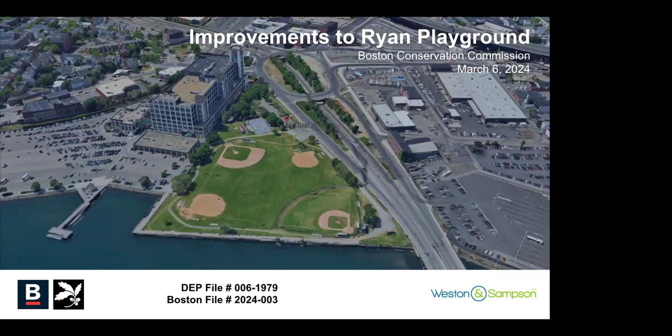Okay, fantastic. A few things. First of all, Commissioner Long, you probably have something to say here before we get going. For the record, yeah, I'm going to have to recuse myself because I work for the applicant. Fantastic, thank you. And let the record reflect that Commissioner Conan has joined us. Good evening. Good evening. Okay.

Okay, Brandon, I see you have about 19 slides. You know our level of education here, so I'm sure it'll be quick, I promise. Yeah, that you can get through.

Thank you everyone for listening to us here tonight. We're really excited to present Ryan Playground. We are just fresh off of getting our MEPA certificate and excited to present to you guys tonight. This project has been around in our public process since 2021, so we are eager to move forward, but excited to understand what you guys have to say. I'm going to pass it off to Weston and Sampson.

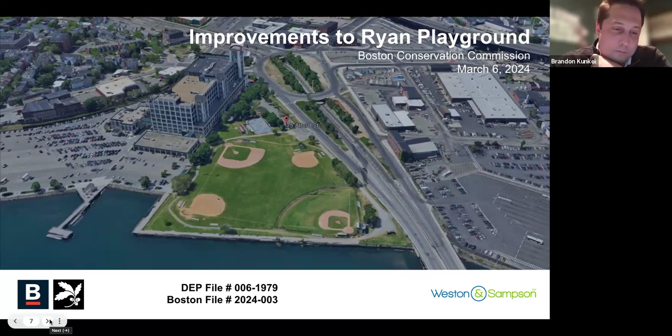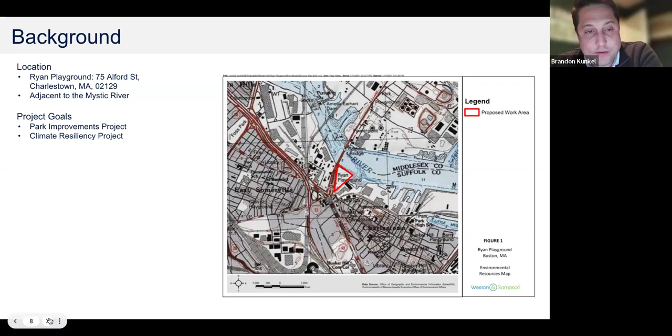Great, thanks so much, B. Yes, we are here tonight on behalf of Boston Parks, and we'll just go through the overall project, and then we'll open it up to you folks for questions. Next slide. Just real quick, 75 Alford Street, Charlestown, Mass, sits adjacent to the Mystic River. It is a total park improvements project and a climate resiliency project, as we noted in the opening. Next slide.

Some existing conditions include the ball fields, the hockey rink, a playground, the Eversource head house, edge conditions along the Schrafft's Center, an existing harbor walk, and an existing seawall. Next slide.

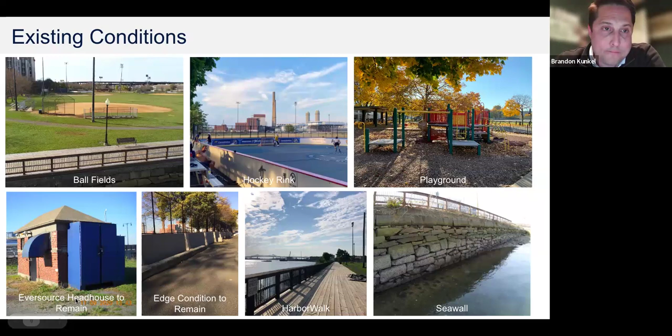There is an existing parking lot. We are reducing it from 38 parking spaces and keeping 6 total parking spaces for emergency vehicles and accessible parking. We are upgrading the stormwater system throughout the entire park, and we will talk about that.

We will be installing a berm for climate resilience within the buffer area, which is the key trigger for this evening, but it's for climate resilience, erosion resistance, and plantings will be provided.

We will be providing ADA and MAAB standard walkways and pathways throughout the entire park, as there aren't many now. We'll be providing public spaces throughout, including 2 overlook decks along the Mystic River, as well as a river walk and additional plazas and park entries along the berm.

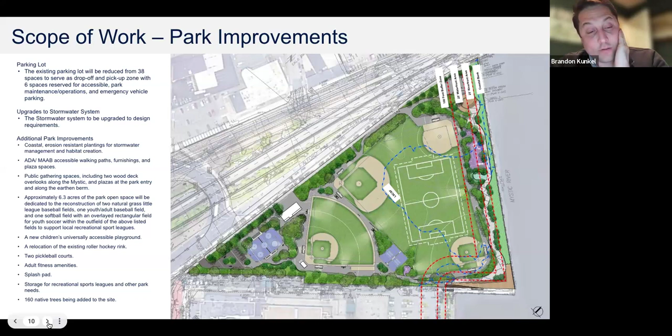A universal accessible playground. We'll be relocating the existing hockey rink, adding 2 pickleball courts and an adult fitness area, a splash pad, and storage, and then installing 160 native trees. Next slide.

Along the top of the berm, and unfortunately the slide is cut off because of the cameras, but we are proposing a river walk. The berm will be vegetated heavily along the Mystic River side in order to reinforce the berm itself from erosion, as well as provide natural habitat.

The river walk will be approximately 6.5 to 7.5 feet above existing grade, and that is dictated by the 2070 sea level rise elevations of elevation 22.

And we will be installing walls as part of constructing the berm in order to hold up the river walk, and that'll be supported on lightweight fill and ground improvements, which are all within your jurisdiction. Next slide.

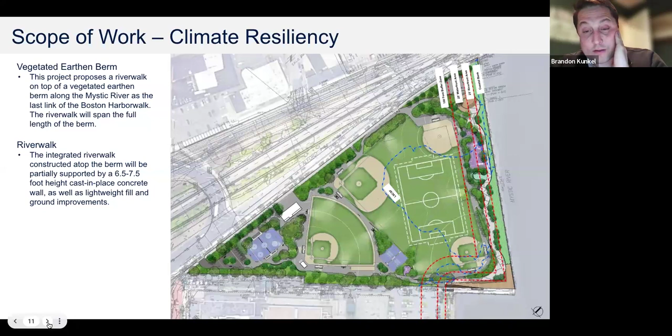And if Haley is on and able to speak, I would actually like to hand it over to her. Sure thing, I'm here as long as everyone can hear me. So I am the wetland scientist who worked to pull together these permits. I'm going to speak just very briefly through some of the impacts that we're proposing within your jurisdictional areas.

So within the 25-foot waterfront area, we are proposing 22,832 square feet of impacts. These impacts are associated with the proposed climate resiliency measures, including the vegetated berm, the seawall, and the river walk that Brandon was just mentioning.

Additionally, we'll be impacting land subject to coastal storm flowage. 115,512 square feet will be impacted due to the climate resiliency measures and the construction of the updated recreational fields.

Within the 25-foot riverfront area, we are also proposing 22,832 square feet. The impacts are associated with the climate resiliency measures that were the same as mentioned above. And finally, the coastal bank, we are proposing 929 linear feet of impact, which is due to the installation of the elevated river walk that will align with the limits of the coastal bank.

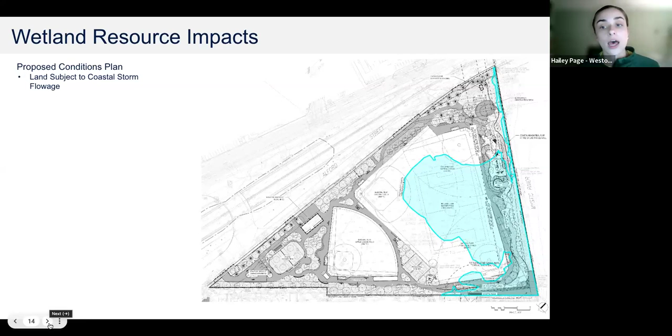If we could flip to the next slide, please. This is also looking to show the coastal bank limits that we will be impacting as a part of this project, which I think is blocked as well. So let's flip ahead to the next slide.

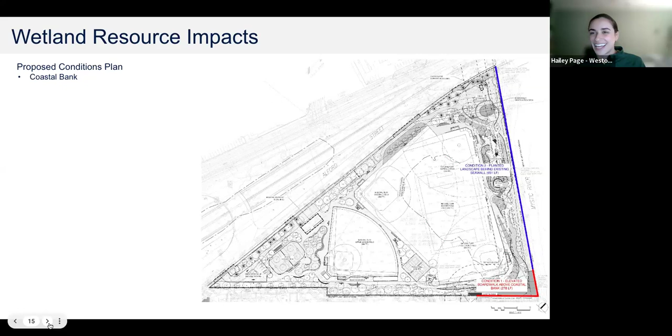Also, sorry Haley, I don't mean to interrupt. I just want to make sure I'm seeing the full slide deck. I was just wanting to make sure, can everybody else see the full graphics so that you can all see the plans and everything? It looks normal on my end. I just wanted to see how everyone else was seeing it. All good? It does. Hold on, I'm looking at the same thing. It's cut out, I can't see. I think on this one at the bottom it says maybe no, it's not boring location, but I don't see a legend on the bottom on this. In the NOI, I see legends on the bottom of these graphics.

I'm not sure we pulled legends into these because my intent was to point to the areas, but everyone's Zoom is a little different, some videos on the side, some on the bottom. As long as commissioners and the public can see the full plan set, we should be good. I can see the whole graphic, just wanted to make sure that was good on everyone's end. I think I see the whole graphic too, but I don't know what I'm not seeing, so I don't know if I can answer this confidently.

Is there a dialogue box? The edge of the park is essentially where it's closest to the river, that's where it would be cut off, at least on my screen. I can see the whole screen, but your voice comes and goes. Sorry about that, I'll get closer to my computer. Sorry if you're just looking at my eyebrows.

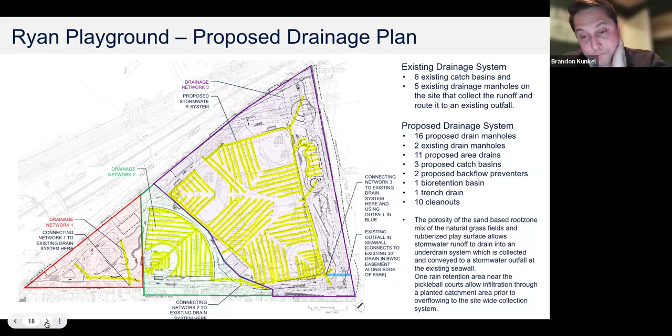And then I wanted to touch quickly on the resilience piece, because I know that's very important to the city. We did look at the 100-year 1% storm, the 4-year 25% storm, and the 1-year 100% chance storm. We looked at all those through 2070, 2050, and current conditions. Next slide.

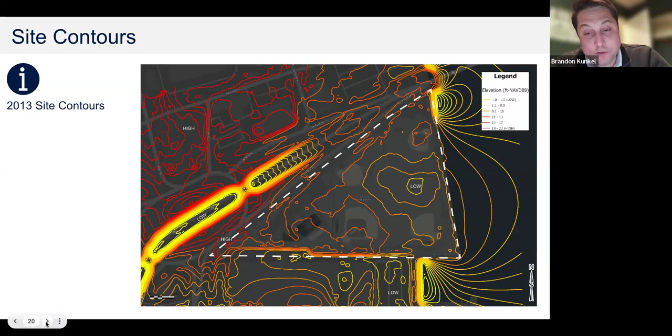This is just the topography as it is today, and you can see the low-lying areas up against the Mystic River, and then particularly out in Alford Street. As we jump to the next few slides, you'll see why these all make sense and why they're at risk.

So this is the current condition as it is today with regards to sea level rise and storm events. Now, to my knowledge, there has never been flooding on the site as it is today, but there are 2 major flood pathways that have been identified through previous studies, and they are on the adjacent site, but we are aware of that as this is a coastal resilience project.

We are combating that through berm construction, as I noted. But you can see here today, there is some risk to the site itself, but more importantly, I just wanted to point out that until the abutters and other adjacent property owners put in their mitigation and resilience measures, the site still will remain vulnerable. But it is just a key piece in the puzzle of a resilient coastline for the city.

So this is its current conditions as it relates to land subject to flooding during storm events. Next slide.

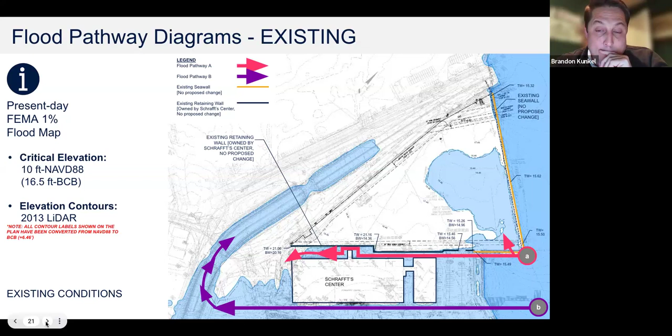This is the proposed condition in present-day data as it relates to storm events. So you see that's automatically mitigated. The park itself will be protected, but you can see during future storm events, the Schrafft's Center really does become the thoroughfare for flooding into the city itself, but we have mitigated it from the park side. Next slide.

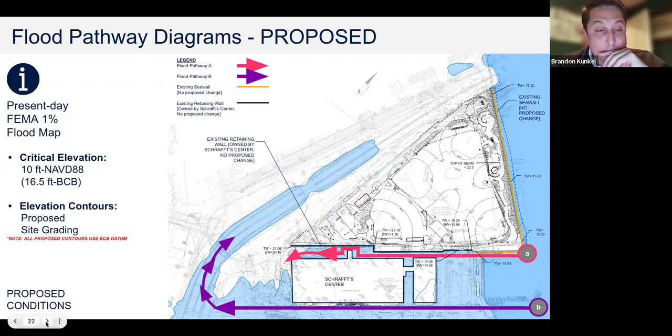And that is it, and I will hand it back over to you. Thank you for your time this evening. I know we probably went a few minutes long, but we felt it was important to tell the whole story.

Okay, great. Thank you. No, I appreciate it. And thank you for all the materials. It's not often we get Gaining Ground, Nancy Seasholes' book in an NOI. So appreciate that little piece of history.

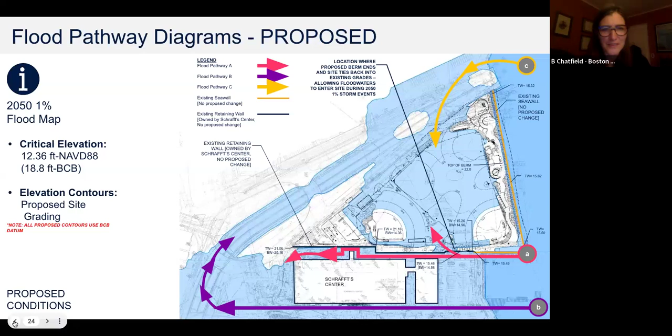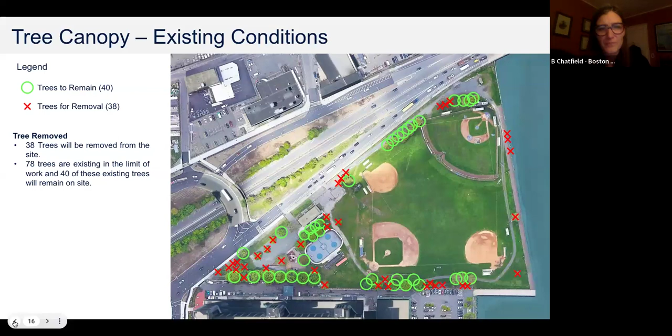Just to the site plan. Do you guys know what page it's on of the presentation? Is it the scope of work, climate resiliency slide? I believe it's slide 5. This one? Either one's fine. I was looking at slide 17. When I said gray, it was the slide you just passed. Yeah, right there. I don't know how to tell you where it is though.

Sure, are you sort of talking about, so you see the brown elbow down at the bottom of the screen? Yeah, so it's almost two thirds up from there, and there's a little appendage coming off the Riverwalk. It's almost a teal green color. Yep, and then above that there's a brown, semicircular ellipse shape.

Okay, so what is the teal thing, and what's just above it? That thing is a splash pad, adjacent to the playground, which will be spray to drain, and then that goes to the outfall.

And then I'm not sure what gray area you might be referring to. Maybe it's storage. Is it purple? The purple area is the playground adjacent to the splash pad. Okay, all right, thank you.

Thank you for bearing with me. No, that's fine, no further questions, thank you. Great, thank you, excuse me.

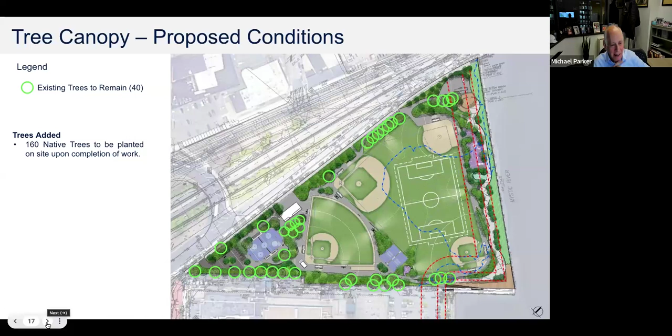Elena, any raised hands? I don't see any raised hands, and nothing has come in during the hearing in the inbox. Okay, great. So with that, I would entertain a motion to accept, to issue the order of conditions for this project and close the hearing.

So moved. We have a second. Great, okay, thank you. Commissioner Sullivan, aye. Commissioner Wilson, aye. Commissioner Conan, aye. Commissioner Richmond, aye. Commissioner Herbst, aye. And I vote aye, so that carries 6-0.

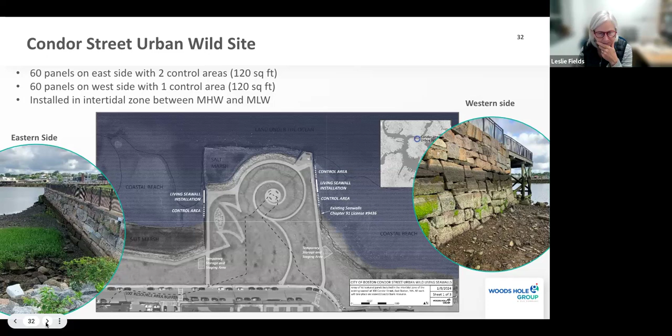This is looking straight on at one of the installations at this site, and you can see the tiles are within the intertidal zone. The construction we're proposing will be on the coastal bank resource and also in land subject to coastal storm flowage. Access to the site for both installation and monitoring will be across the coastal bank. They'll be walking on the coastal beach during times of low tide, and accessing it through land subject to coastal storm flowage.

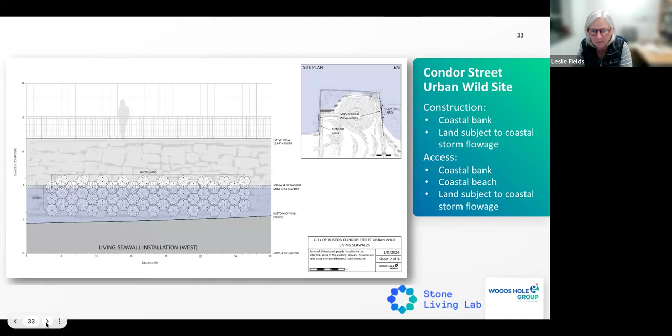This is the other site, Fan Pier, in Boston proper facing Boston Harbor. There's a funny little well area created with the seawalls there, and a walkway along the harbor walk that goes over an open area where water is allowed into this little basin. We're proposing to install 120 panels on the eastern side of this well, shown in the picture on the lower left. There will be a control area on the other side of the well where we monitor for ambient growth, with no tiles installed. Then we have 2 other control areas, one on the north-facing side of the seawall and one on the east-facing side. Everything's installed in the intertidal zone.

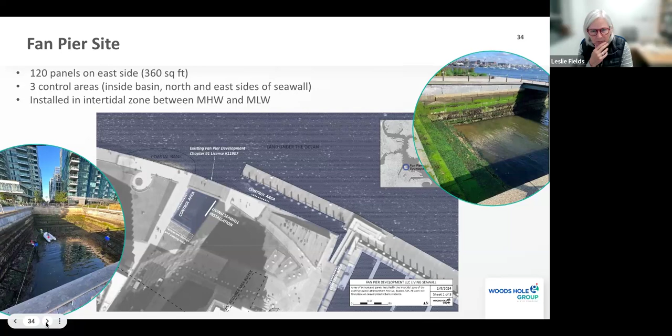Resource areas here are coastal bank throughout on these seawalls, and then land under the ocean. This is looking straight on at this site, where we've got those 120 panels. Construction will be on the coastal bank, access will be on the coastal bank, and temporary storage will be landward of the seawall in the upland.

This slide shows that we're going to install 5 different types of tiles. These are concrete tiles molded using a 3D printer. We've got a smooth control surface tile installed just for baseline monitoring, and small and large rock pool tiles, mainly for invertebrates and algae that need some sort of constant moisture to survive.

The 4th one is a swim through tile, for small fish. When they're foraging and swimming around, they can find places to hide. All these tiles are set off the face of the seawall, so on the swim through tile, the fish can go through those holes and hide behind the tile.

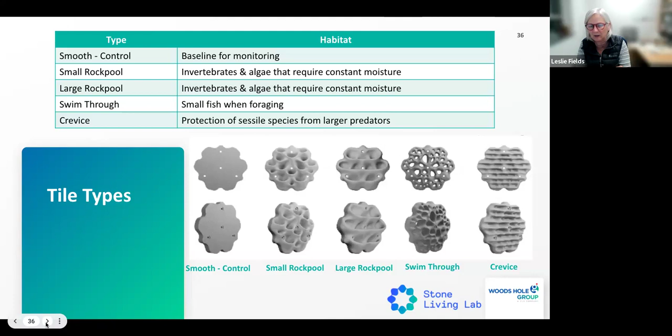The crevice tile is the last one on the right. That's protection for sessile species from larger predators as they get into those crevices. Next slide, please.

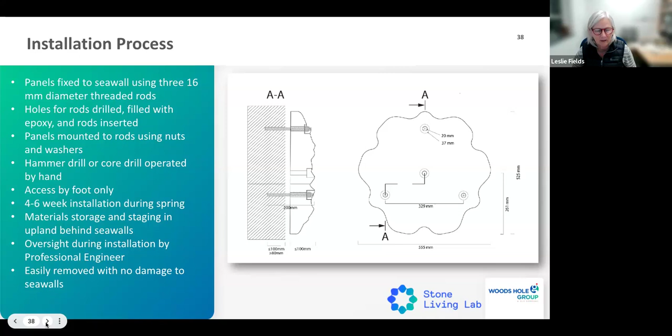Monitoring program - this is an important part. It will be monitored by the Byrnes Lab, operated from UMass Boston. They'll be out every 3 months to monitor growth on these walls, both sessile and mobile growth, within quadrats shown in the picture using PVC squares. They'll count types and numbers of species, look at percent cover and abundance within each panel, and do statistical analyses to produce graphics like you see here.

We'll be monitoring every 3 months, including before installation, then once installed every 3 months through summer, fall, and late spring. Those reports will be made available to the public on the Stone Living Lab website, and also provided to the regulatory agencies. Next slide.

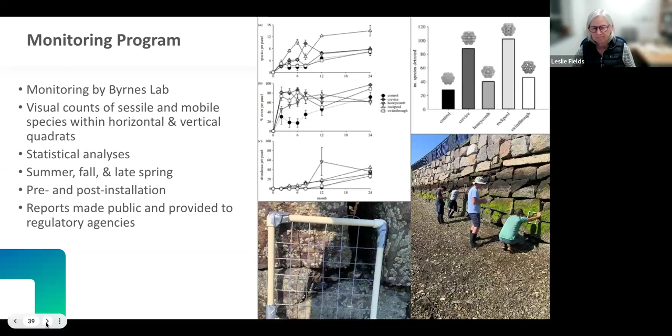Here's a schedule. Leslie, could I share one thing quickly? Yes, please. I want to make sure to share that we look forward to providing those reports directly to the Conservation Commission as well. Yes, absolutely. Thank you.

This is just a quick schedule. We're doing project scoping, design, and permitting right now. We hope to be ready to install spring of 2024. We'll monitor for the next 3 years, spring of 24 through 27, with reporting every 3 months to the agencies and the Conservation Commission, and removal in spring of 2027. Next slide.

We provided documentation in the RDA that the project complies with performance standards for work in coastal bank, coastal beach, and land subject to coastal storm flowage. We are requesting that the Conservation Commission issue a -2 determination.

To address Commissioner Parker's comments earlier about filing a notice of intent, we feel the project can be issued a -2 determination of applicability because we're not removing, filling, dredging, or altering the resource areas. The coastal bank we're working on is still going to be a coastal bank and will still serve all the interests that coastal banks are intended to serve under the wetlands regulations.

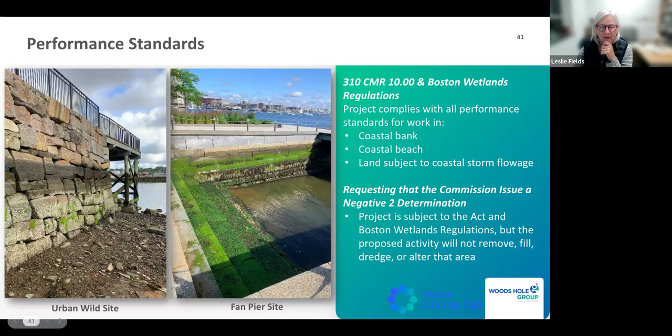Okay, great, thank you Joe for anticipating my question about the monitoring reports. As far as the installers, are they going to be volunteers overseen by professionals? Correct, I think members from the Burns Lab will also be involved with installation, but it will be overseen by a professional engineer.

Same thing when they go in to monitor? Yes, Burns Lab is in charge of that, and there will be some volunteers, like an educational component, but it will be overseen by the Burns Lab.

Could I make one adjustment? For the monitoring program, I wanted to make sure I heard your question right - it will be volunteers and students overseen by a lead researcher. But on the installation, this will not be volunteers, this is a subcontractor overseen by a professional engineer doing the installation work. And the same with the removal? Correct, correct.

Okay, I am still stuck on the word 'alter' in the definition for when we can issue a negative 2 determination. So Commissioner Herbst, I'm going to put you on the spot - I'd like to hear your thoughts on that. Give me a reality check.

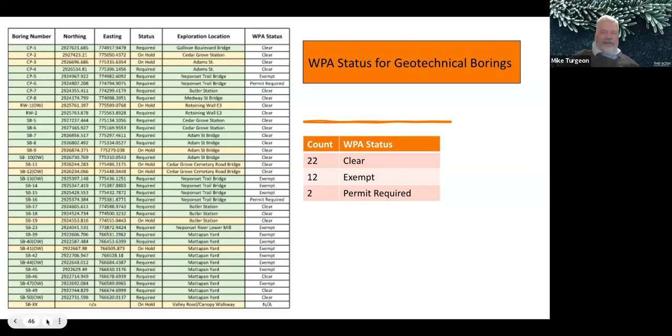And this list was sent to Alina recently. Next slide, please. So this kind of shows the locations of all of the borings.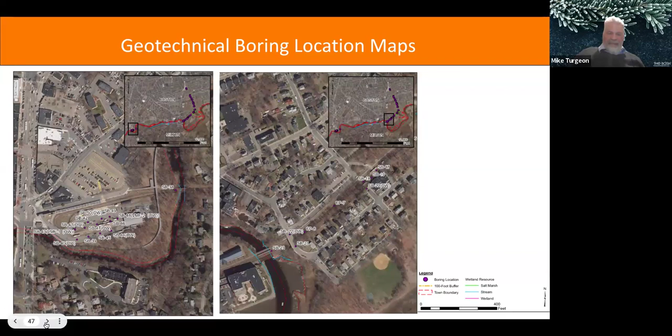This slide, there's borings on here that are outside of jurisdiction or within the polygon for isolated land subject to flooding, but above the base flood elevation of 10, and it's shown in the table that we submitted.

CP6 and SB16 are the 2 that are in or adjacent to the land subject to coastal storm flowage polygon and below the 100-year base flood elevation. The base flood elevation here is at 10.

The CP6 is at 9.76. Okay, SB16 is at 9.68.

So those two, and you can see the salt marsh designated by the orange line and the buffer zone by the yellow line, and then across the trail, there's a track. The tracks are in here, and then the Neponset Trail, and on the other side of the trail, there's a stream and wetland, and the work is in the buffer zone to them, but on the far side of the Neponset Trail.

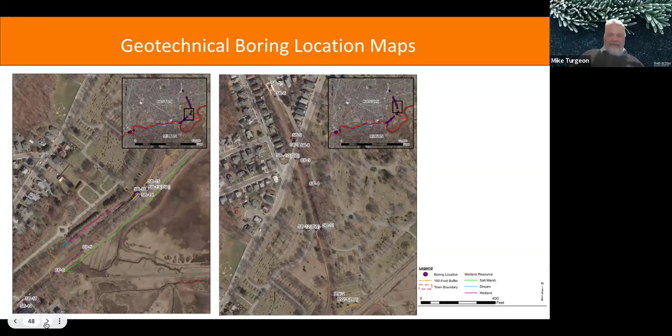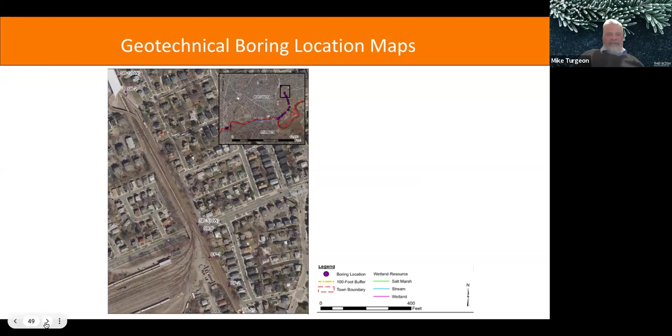And then on the remaining slides, all of the boring locations are outside of jurisdictional area. So if you go to the next slide, that's our table for all the borings that are near the polygon. It lists the base flood elevation, and the two that are beneath it are in pink.

And this is just a blow up of the area that we just talked about next to it. So CP6 again is between the tracks. SB16 is along the trail on the west side of the trail, just next to the bridge abutment.

And that is our presentation. The borings are required to establish depth to bedrock and the soil conditions in the area.

For either, the SB16 is for a structural boring associated with the bridge, and CP6 is associated with making sure they can get a catenary pole in. So that's the extent of the project. Let me know if you have any questions.

Great, thank you, Mike. I don't have any questions on this. Elena? I just want to note that the letter that was mentioned in the presentation is in the folder for the commission's review. Thank you.

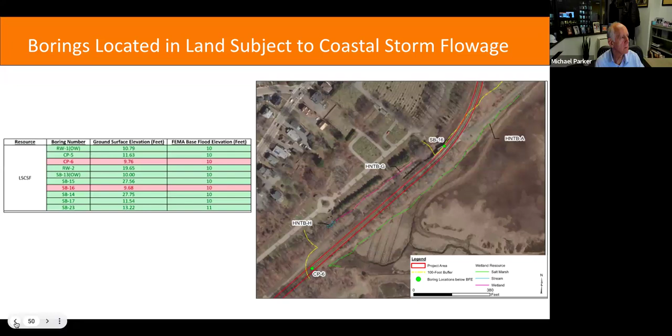Commissioner Sullivan? No questions. Commissioner Long? No questions, thank you. Commissioner Wilson? None here either, thanks. Commissioner Conan? No questions, thank you. Commissioner Richmond? I don't have any either, thank you. Commissioner Herbst? Nothing from me.

Okay, Elena, any hands raised? I see no hands, and we don't have anything in our inbox either. Okay, so I'd entertain a motion to issue a negative determination of applicability with standard erosion controls.

So moved. You have a second? Second. Thank you. Commissioner Sullivan? Aye. Commissioner Long? Aye. Commissioner Wilson? Aye. Commissioner Conan? Aye. Commissioner Richmond? Aye. Commissioner Herbst? Aye. And I vote aye. So that carries 7-0. Thank you.

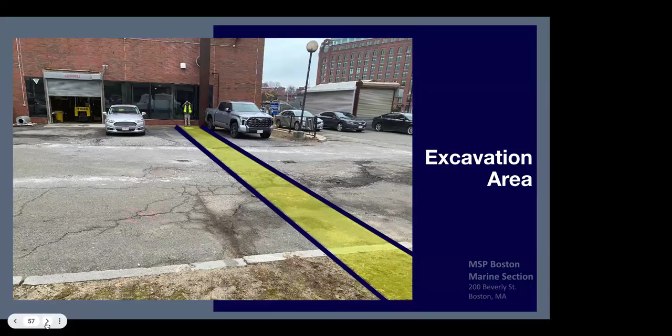You can go to the next slide. This is looking in the other direction. You can see the underground storage tank there, straight ahead in the center of the photo. Again, the yellow highlighted area is the proposed saw cut and excavation area, and in the background you can see lots of state police equipment, and the Zakim Bridge is actually in the far background of that.

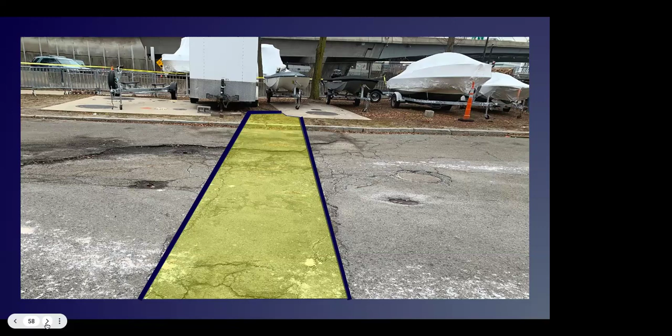That's the end of what we have proposed here. Open it up to questions from the commission members.

Since I missed the last boat to Charlestown, I'll be walking through there tonight on my way home, so I'll make sure I do a site visit here. Hopefully you're not closing the locks and I have to walk around. But quick question for Charles.

What was the impact of the breach here? Did any... well, I can answer that question. Where was the lost product? Where did that go?

The lines, there's a return and a feed and return line, and both those lines are contained in a 3 or 4 inch conduit. They failed the tightness test. We have not done any type of investigation to find out what type of impact that may have had. There may be no impact to soil whatsoever. It may have been contained within the conduit. We don't know that yet until we open up the earth and take a look.

Okay, so that's why you're here. What do you expect if you did find something, just in rough scope of how much?

I don't know if it would be soil that needs to be removed here. Well, what our thought process is here is that the trench is going to be, like Adam said, probably 3 feet deep, maybe 2 to 3 feet wide. If we come across an area of contaminated soil, we're going to have to excavate it. I don't know how much may have been released.

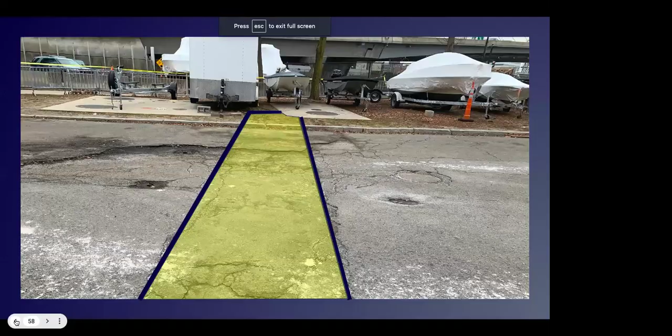Great. I don't know if anybody made the motion, so I'll start over. I'll entertain a motion to issue a negative determination of applicability, with standard erosion control conditions, plus a condition that we receive the tank integrity reports that they have.

And I think that was it, right? There's nothing else. Okay, so that's the motion. Sorry, Chair Parker, to clarify, the existing reports and then also the next one.

No, as long as they have the existing reports, then we'll be assured that they're on the regulatory timetable. So we won't need the next one, just the existing ones. Thank you. So moved.

You have a second? Second. Okay, Commissioner Sullivan, aye. Commissioner Long, aye. Commissioner Wilson, aye. Commissioner Conan, aye. Commissioner Richmond, aye. Commissioner Herbst, aye. And I vote aye. That carries 7-0. Okay, thank you.

Next item on the agenda. Request for an extension for DEP file number 006 1700 from Susan Bernstein on behalf of the Union Wharf Condominium Trust for the ongoing maintenance and stabilization operations of the seawall located at 343 Commercial Street, north end of Boston. Resource areas: coastal bank and land subject to coastal storm flowage.

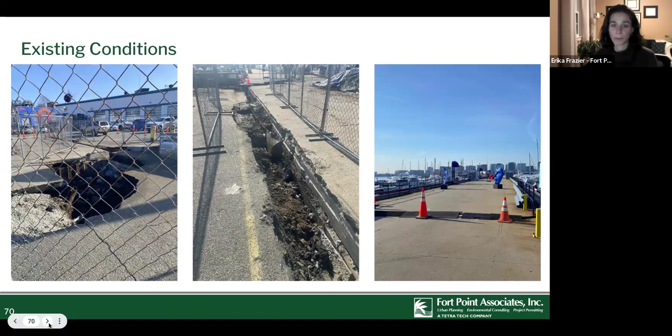To ensure public safety, the shipyard put a fence around the area, located the area where there was damaged power, and currently there are temporary repairs so that the lived-on vessels in the marina are receiving power, as well as the commercial fuel dock.

So the existing wetland resource area at the site is land subject to coastal storm flowage, and then there's also the coastal bank buffer zone. Next slide, please.

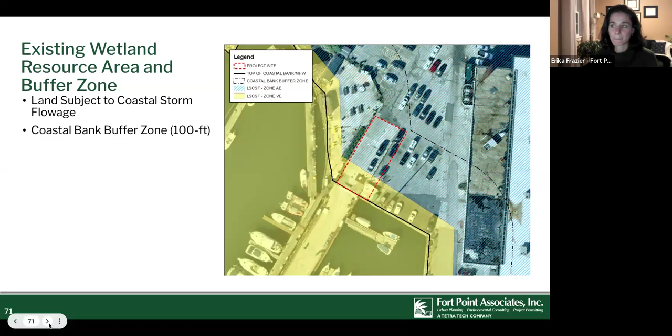For mitigation measures, we're going to be ensuring that all of the resource areas have minimal impacts, and where they're unavoidable, just having temporary work due to the nature of the site. Erosion controls were also placed around the soil stockpiles and covered by tarps. And as I already mentioned, the proponent fenced off the limit of work just to ensure public safety.

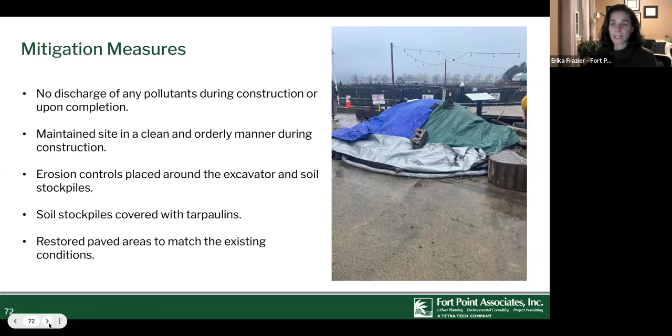And then next slide, I will turn it over to Marshall, who's just going to go over the proposed schedule for these repairs. Thanks, Erika. Good evening, everyone. So, yeah, this is just a kind of high-level overview of our schedule.

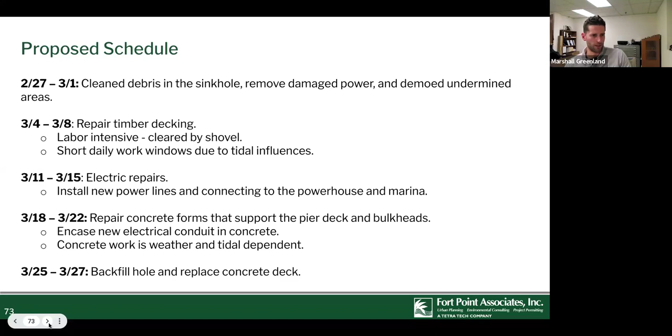2/27, 3/1 last week, cleared out the debris, removed the damaged power, made everything safe, demoed some of the undermined concrete surface and asphalt. So 3/4 to 3/8 is this week.

So kind of first step is to repair the timber deck that failed, which created the sinkhole. So we've been working on that. We actually located the failure today, so that was good. So we'll work the rest of the week to clear that up. We are working with the tides and the weather and everything else. Rain's held off enough this week, so it's been in our favor.

So the plan is to finish up the floor repair this week, which will enable us to make the permanent repairs to the electric, so we can remove the temporary solution that we have right now. That's projected to take 4 to 5 days with our electrician.

And then the following week, once that's repaired, we'll repair the concrete forms that support the pier deck and bulkheads that were either damaged in the sinkhole, or that some of them had to be demoed to access the failure in the floor. We'll encase the new electrical conduit in concrete. Again, weather and tides we're working against. But a week should be enough there.

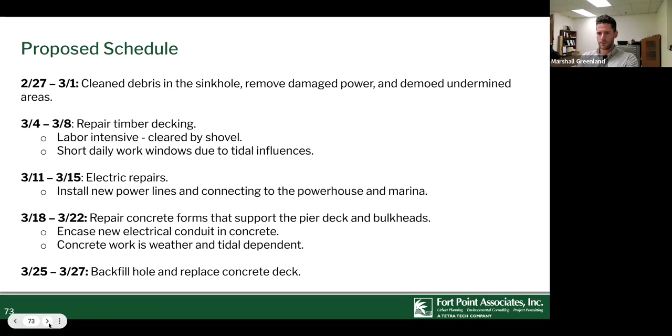And then following that, just backfilling what was excavated, and replacing the concrete deck that either failed with the sinkhole or had to be demoed for the repairs. So that's kind of how we worked out the schedule, and it's been going on track. Okay, next slide. Good. There we go. Okay, questions.

So a few things. One is a question for you, Marshall. Are you the manager at the marina? Yes. Okay, so why weren't we called before any work was done? How come staff? I mean, I want to preface this, this isn't the first time. So what's going on? I mean, this was, I guess, just a short oversight.

I know we had electricity arcing, and the team kind of jumped on that. And once our communications throughout our teams and to me and everything else, we reached out to communicate to you.

Yeah, I mean, sorry to interrupt, but it seems like this is the second time this has happened within a short period of time. It seems like there's some training and education that needs to be done with your team. You're in a wetlands resource area, so any work that you want to do, you have to contact staff and determine whether it rises to the level of an NOI. I appreciate that this was a sudden event, but to call staff, the electricity didn't upset anyone's cell phone or anything like that.